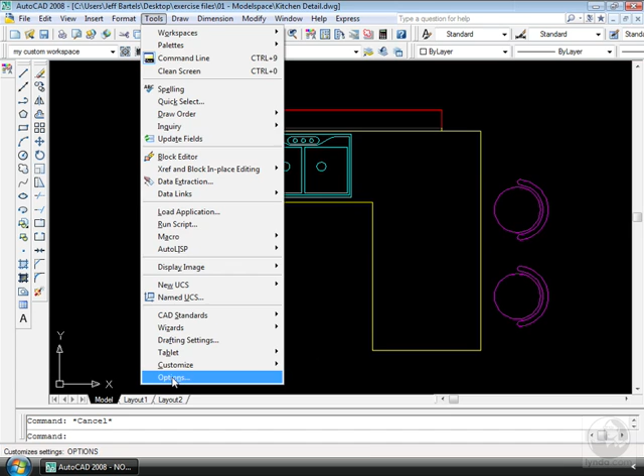If I want to do that, I can come up to my Tools pull-down, and I can come all the way to the bottom of the menu and select Options. This is where we change the user preferences in AutoCAD. Notice that our options are segregated into tabs, and as I click on these tabs, we can see there are an astronomical number of settings that we can change in AutoCAD.

We're certainly not going to go through all of them. What I'm going to do first is show you how you can get information about what each of these options does. If I come up to the upper right-hand corner of the Options dialog, notice I've got a little question mark button. This represents a help feature. If I click on this button, AutoCAD puts the question mark on my cursor, and then I can left-click on the option of my choice, and AutoCAD will tell me what that option does.

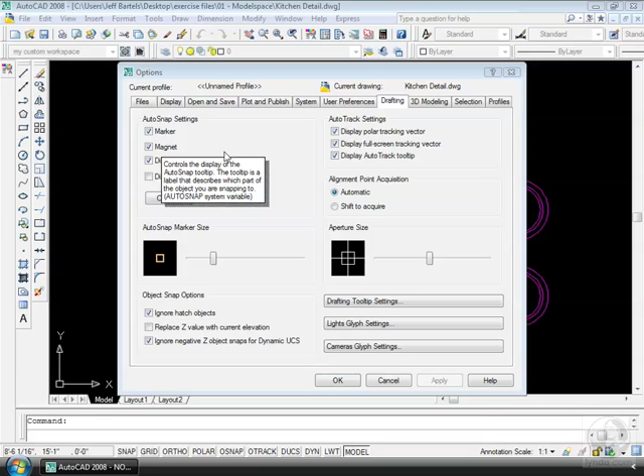Let me hit Escape to clear the help information, and let's change some settings. I'm going to go to my Display tab first, and in the array of settings on this tab, notice that they're arranged in groups with a heading. I'm going to go to the Window Elements heading, and come down to Display Scroll Bars in Drawing Window. Like I said, the scroll bars aren't very important anymore. There are better ways to manipulate our view on the screen, so I'm going to turn these off.

I can do that by clicking on this checkbox to remove the display. Now I'm going to come down and click my Apply button, and when I do, watch those scroll bars on the side of my screen. Notice AutoCAD takes them away.

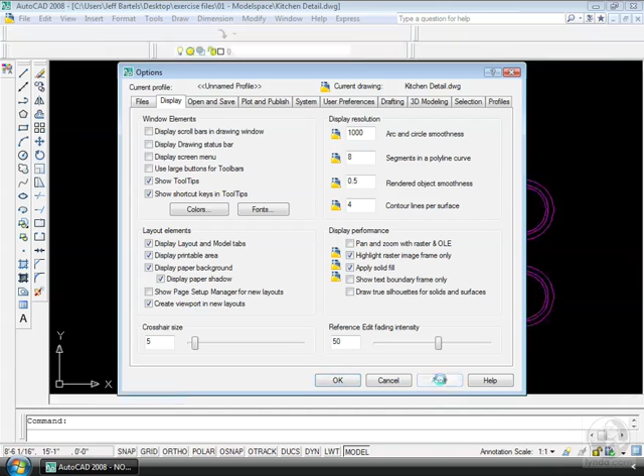The next place I'd like to go is my Selection tab. I'm going to click on the Selection tab, and let's address that issue with the highlighting of our entities. I'm going to go to my Selection Preview area, and take the checkbox out of 'when no command is active.' This means that when I move my cursor over an entity, it's not going to highlight on my screen.

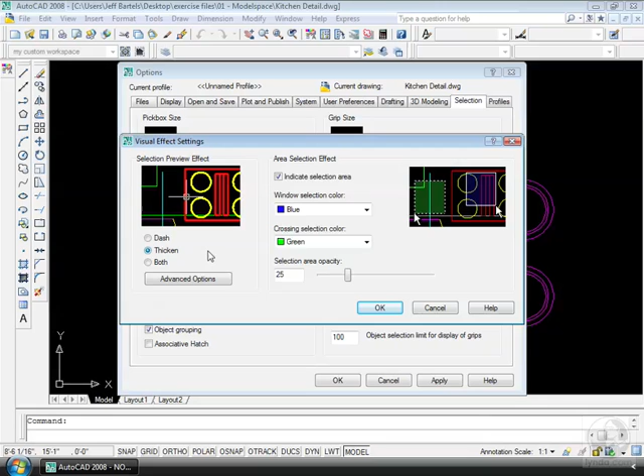I want to do one more thing. Let's click the Visual Effects Settings button, which controls how the entities are going to highlight. Right now it's set for both, meaning it's going to be both dashed and thickened when it highlights. I'm going to set this for thicken only. This means when I'm in a command and I move over an entity, it's just going to get a little bit thicker on my screen, giving me an idea of what I'm selecting. Let me click OK.

One more essential setting I want to make is to go to our User Preferences tab, and select my right-click customization button. This is where we control the right-click functionality of our mouse. When the right-click customization dialog comes up, I want to ensure that we are both using the same settings, so I want to make sure that we're both set to Shortcut Menu, Shortcut Menu, Shortcut Menu. That means that every time we right-click, AutoCAD will bring up a context-sensitive menu and not do something else.

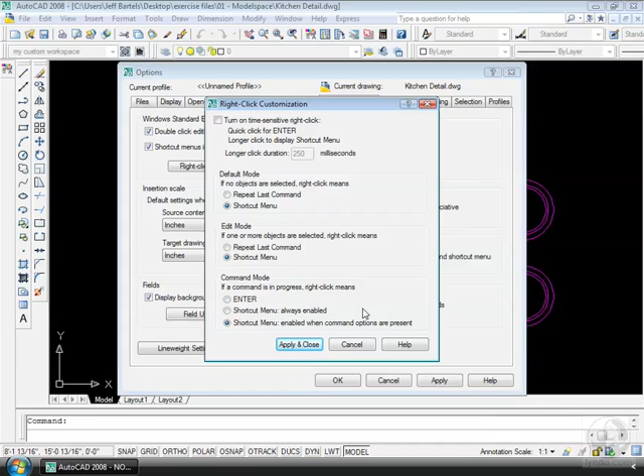This way we're both using the same settings. You'll be able to do the same things I do throughout this title. I'm going to click Apply and Close, and then I'm going to click OK to dismiss the Options dialog.

At first glance, the Options dialog box may seem a little intimidating. However, as you continue to use the software, you'll begin to recognize the relationship between the commands, the interface, and the user preferences. Soon, changing your settings will become second nature.